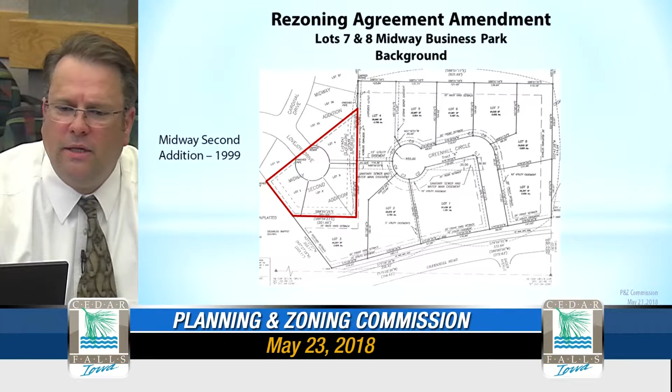That property is located along Greenhill Road. As the development continued, it started with the Midway second addition in 1999, which created 4 residential single-family lots off of Lovejoy Drive, creating a cul-de-sac. With that new cul-de-sac, it essentially takes away that traffic movement and isolates the rest of the development, about 7.5 acres, called the Midway Business Park, created in 2003.

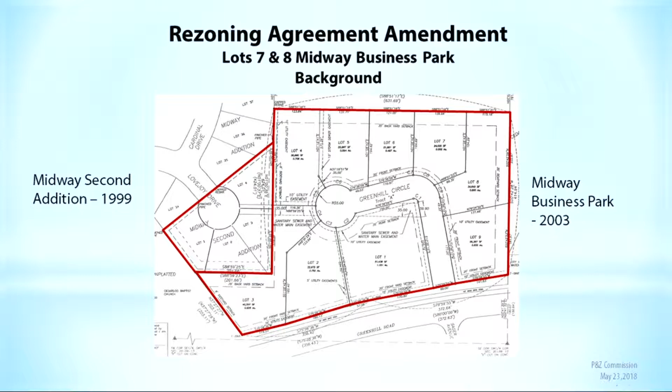That created 9 new lots for commercial development. Since then, the property owner, First Security State Bank, purchased all those lots and built their branch facility at Greenhill Circle, since around 2003. More recently, the Community Foundation of Northeast Iowa built their new building at the end of Greenhill Circle. Development hasn't been taking place much in that area since.

The new proposal is at the northeast corner for a senior housing facility, and this is a site plan of what that layout will look like. The staff report reflected a 2-story building, but this is going to be a single-story building for 16 residents.

These are senior assisted facility residents. Each resident has their own bedroom and bathroom, but they all come to common areas. So it's not 16 individual dwelling units, it's basically 1 unit for those tenants or residents.

They will not drive to this facility. The parking is there just for employees and visitors. So basically that site plan satisfies zoning requirements for the district, setbacks, parking and landscaping. This is a permitted use in the R4 zoning district, so staff believes this is a less intense use, and we would like to move forward with approval based on comments from the Planning and Zoning Commission, and schedule a public hearing at the next meeting.

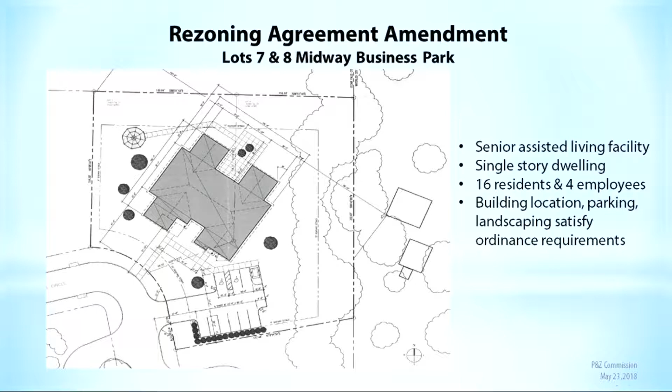We might have to trim it back a little, but we'd rather not get rid of it. Everybody wants some privacy, and we'd like to keep it if there's something we could do. If we had to do something, I'm sure we could create privacy again, but there won't be any outside noise or much going on there.

Is there any intention of taking Scenic Drive on into that field there, around my house, ever, as part of this plan or a future plan? You're referring to the field to the north of this development? Well, yeah, it'd be to the north.

That field is a detention basin. It serves as open space and detention. It's owned by the city, and that will remain that way in perpetuity.

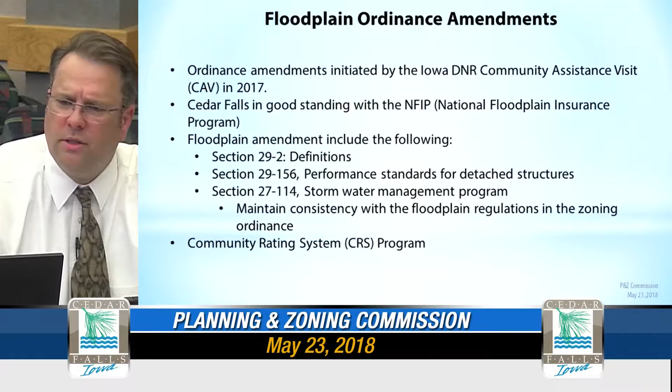With these definitions and changes, that'll just maintain our status in the CRS program. So I want to go through some of these definitions real quick. The idea is that we have a definitions section in the zoning ordinance with general zoning terms, and within that list we also have floodplain terms.

So what we want to do is create a new subsection—one subsection would be general zoning ordinance terms, and the other would be general floodplain terms, just so we can tell the two lists of definitions apart.

Base flood elevation is the elevation of flood waters during that occasion or flood event, referred to as BFE. Those BFEs are shown on flood maps and flood profiles. You might have heard of the 100-year flood or the 500-year flood—those are the base flood elevations for a particular area.

This elevation requirement serves as a guide for structures, and as a structure is elevated, that determines flood insurance premiums. New definitions include factory-built home park or subdivision—FEMA calls those mobile home parks, so we're adding those new terms. Highest adjacent grade is just the grade around the structure.

What's the highest point around the structure? We use that highest adjacent grade and compare it to the Base Flood Elevation, and that tells a property owner or contractor how high to elevate and protect that structure.

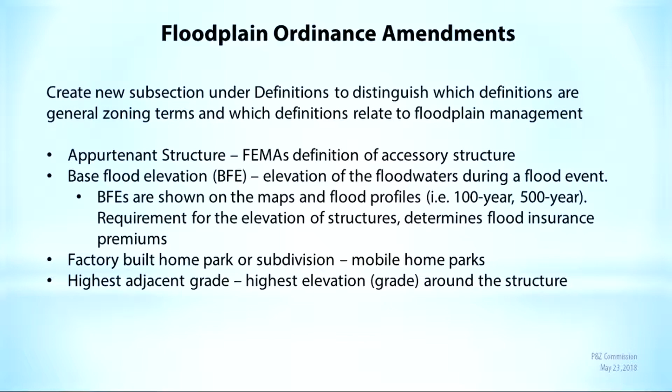Moving on to repetitive loss, this is associated with the type of loss a property receives during any particular flood event. We look at degree of loss or substantial loss, meaning any loss that exceeds 50% of the market value of the house. When that threshold is reached, the property owner is required to upgrade or elevate their house.

With repetitive loss, we can combine multiple flood events to reach that 50% rule. So in the 2008 flood event, someone might have had a 25% loss, then a 30% loss in the 2016 flood event. Together those exceed the 50% rule, so they'd have to improve their structure to meet current standards in the ordinance.

This also allows the property owner to look for flood insurance funds to elevate. There are some funds available to assist property owners with elevating the structure, and again, it adds value to our CRS performance.

Start of construction is a kind of confusing definition for staff, but hopefully I've cleared it up. Basically, start of construction determines when flood maps are renewed or changed, when any base flood elevation is changed, or any flood zone is changed. So if a map is changed, your property must comply with the current zoning ordinance.

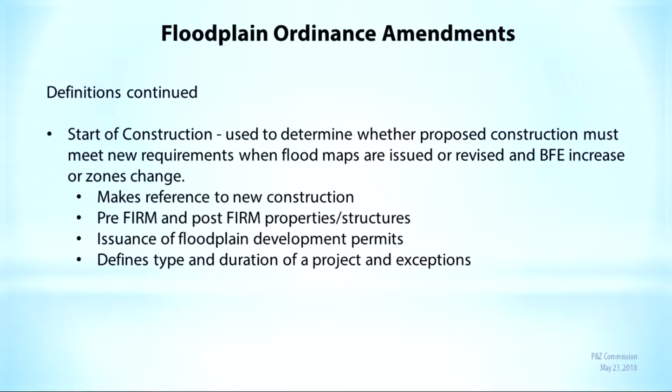It also defines the duration and type of project. The duration means once you get a building permit, you have 180 days to finish the job, and that includes any type of improvement. There are exceptions that don't trigger that 180-day time frame, like site preparation or grading around the property. So that's just another change to note.

So again, we want to recommend approval of those amendments. It reinforces our flood insurance program and regulations, and we'll meet those standards for FEMA and the National Flood Insurance Program. We'd like to hear any comments you have and set a date for public hearing at the next meeting.

Commissioners, any questions or comments? Yeah, David, I think back when we redid the ordinances after the 2008 event, we spent a lot of time on fill and those kinds of topics. When we look at what you just presented, do you see any conflict with what we rewrote regarding how much fill we could bring into certain areas?

No, it doesn't impact the fill criteria for a property. It doesn't impact that, we changed that elevation standard from 100 to 500 year plus 1 foot. Right, it doesn't change that. So really, it's more new definitions and some minor changes in the performance standards for garages. I'm just looking for conflict between one rule and another.

Yeah, I should have mentioned this earlier. These were comments from DNR, so we developed a staff report and sent this back down to them for final review. They're kind of in the process of reviewing this. They sent us the comments, and I put this in the staff report, so I gave them the opportunity for one more review.

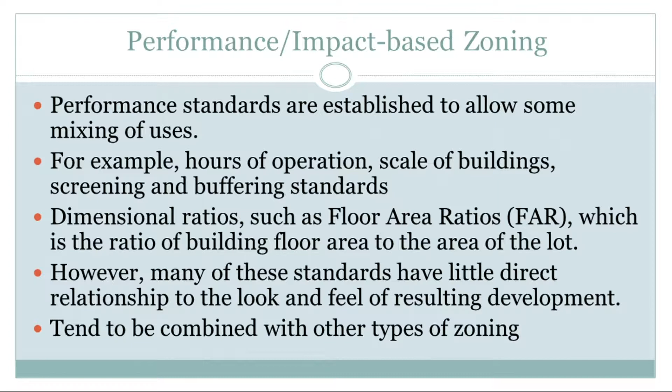Moving on to incentive-based zoning, which is also a use-based organizing principle. Incentive-based zoning enables projects to exceed the base standard. So maybe a building can be 3 stories tall if they provide some additional benefit to the local community. For example, in exchange for providing parks, public art, or affordable housing, you can give them a bonus, maybe a taller building or more dense development, or allow them to cover more of the lot.

The issue with that type of zoning is it can achieve a lot of really great public benefits for the community, but it's usually a negotiated process. It's a little bit messier, can be time consuming and a little unpredictable. But it can result in some pretty good development for the community.

Moving on to the final type of zoning. We have all these traditional types of zoning that are really use-based zoning, as opposed to form-based zoning. Traditional zoning techniques are all organized on the principle of separation of uses. Form-based zoning has a fundamentally different organizing principle. It's based on the form of the buildings, the placement of buildings on the lot, placement of parking on a lot, and how the private space of the building meets the public space at the street.

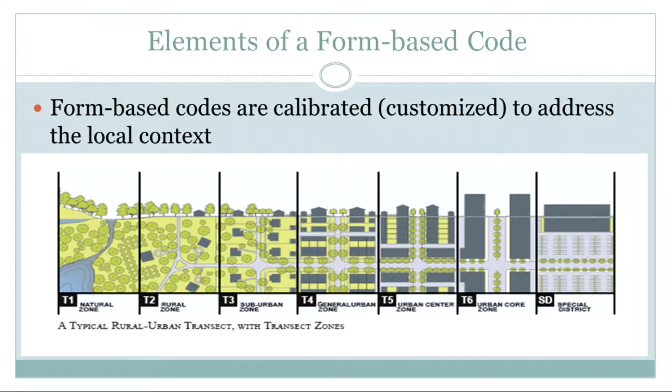So just a little bit about a form-based code. The beauty of a form-based code is that it can be customized to address the local character of an area. You can get as fine-grained as looking at, say, a downtown or a core neighborhood street by street, and code those streets to get exactly the type of character that you desire in the future.

So you set it up to achieve a certain desired community character that's identified through a planning effort, and you're allowed to mix the uses over time. The development standards are fairly prescriptive, and the standards in the code are usually illustrated rather than described in narrative form.

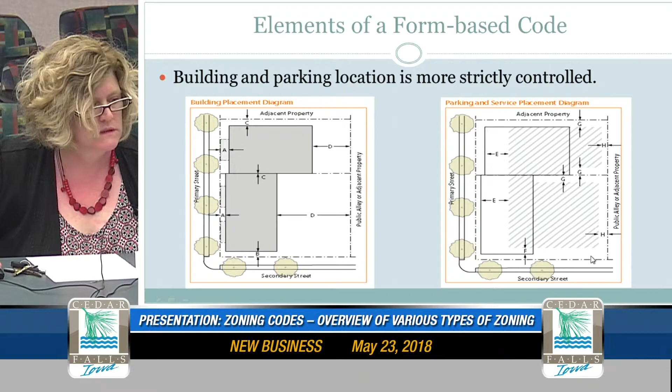There's also usually some sort of height standards, but the residential or commercial intensity or density is really controlled by height and parking requirements, and sometimes those are also illustrated on the regulating plan.

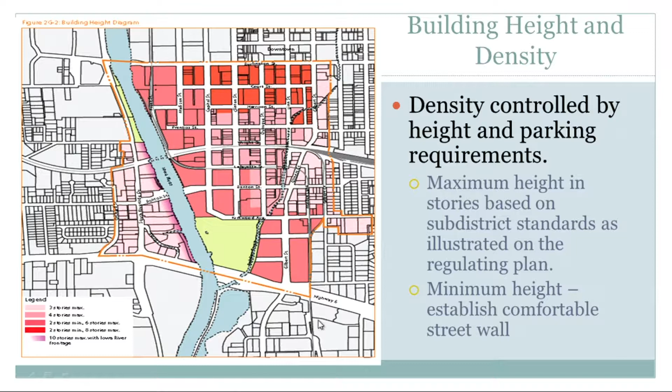Usually there's a broad range of commercial or residential uses allowed, and those are allowed to transition over time. For example, maybe you have a street with older single-family homes right near a commercial area, and there's some desire to transform those into private offices, but people don't want to lose the character of those homes. So it's coded so that character is preserved, but you're allowed to have commercial uses moving in, or you can maintain the residential use. The idea is that uses can move in and out.

This can also be used for a brand new area where you're trying to encourage storefront commercial, but the market's not quite there yet. You build the storefront space ahead of time anticipating that demand, but allow it to be used as a live-work unit with maybe a small home office. Then as the market reaches the point where there's demand for a coffee shop or retail, it can transition to those more intensive uses.

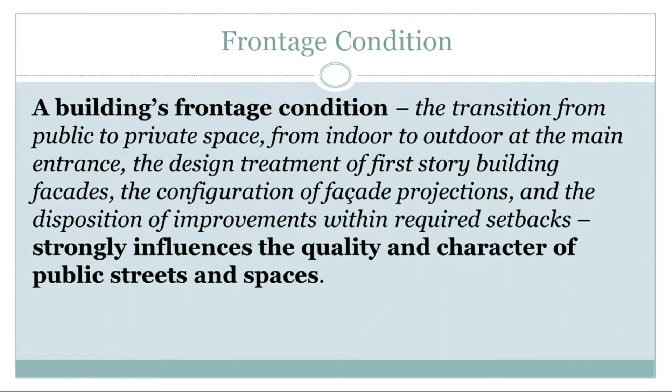How the building meets the street is really important. That's how people experience a city — you're not looking up at the top of a building, you're walking down the street experiencing that first floor and how those spaces meet the public sidewalk, or walking down a residential street past front porches and front yards. That's the character of the neighborhood.

So form-based code really focuses on specifying appropriate types of frontage conditions with the appropriate type of building.

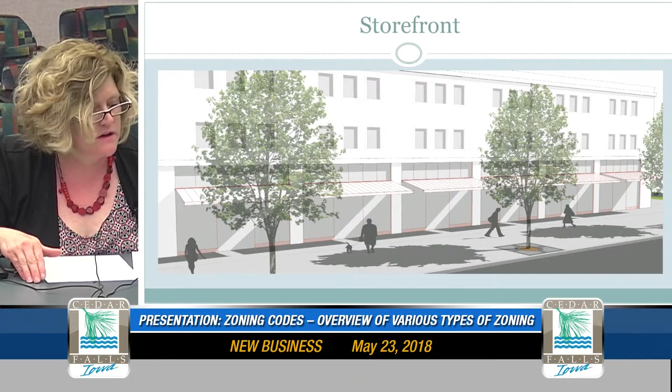Here's a storefront frontage — we're all familiar with that, it's downtown in all our Main Street buildings. It encourages shopping and window displays, restaurants, and activity at the street level.

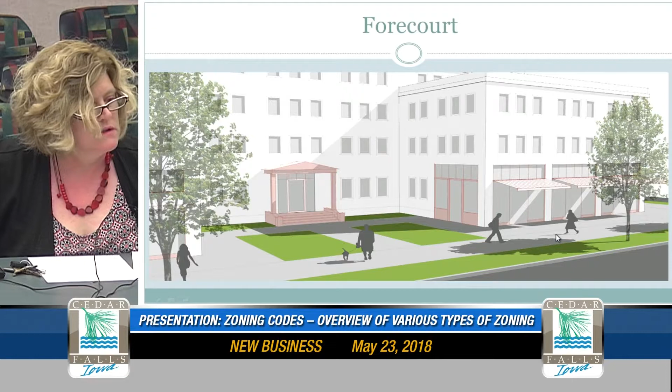A forecourt is a frontage where a portion of the block is set back from the street. Here's a commercial example where they set it back to create an amenity for the urban neighborhood, a bit of green space in a dense environment. And this is your typical old U-shaped apartment building, with the middle entranceway set back to create a little courtyard in front.

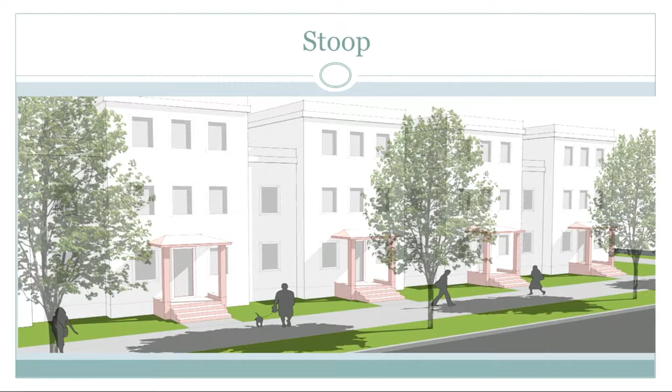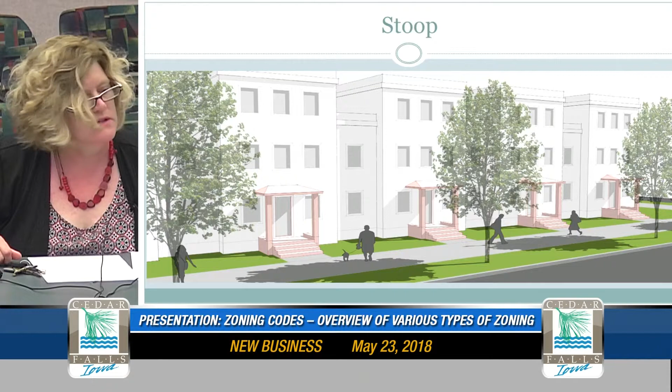Stoops — most buildings have them, where the first level of the floor is raised up, mostly used for residential development. If a building is close to the street, raising the first floor provides privacy so people walking by aren't looking right into your window. That's the idea of the front stoop, a principle used for hundreds of years, seen in buildings from modern to traditional brownstones.

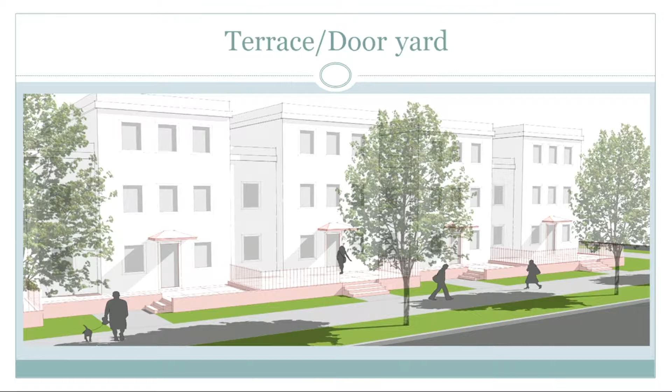The idea of a terrace or dooryard is similar — you raise a residential use above the sidewalk. Usually the building is close to the street, but this provides a little open space between the public sidewalk and the private space, creating a semi-private area for residents. It can be raised or behind a fence to create a dooryard or raised terrace, giving a bit of privacy and open space while staying near the public sidewalk.

And then the porch frontage — everybody's familiar with that, here are some nice examples. The idea is to pair the appropriate frontage standards with the appropriate type of building.

So form-based codes will often have building types depending on the area of the city you're in, like a typical residential neighborhood. This is the concept of missing middle housing, kind of a new buzz term that's out there, coined by Dan Parolek from Opticos Design, a firm out of California.

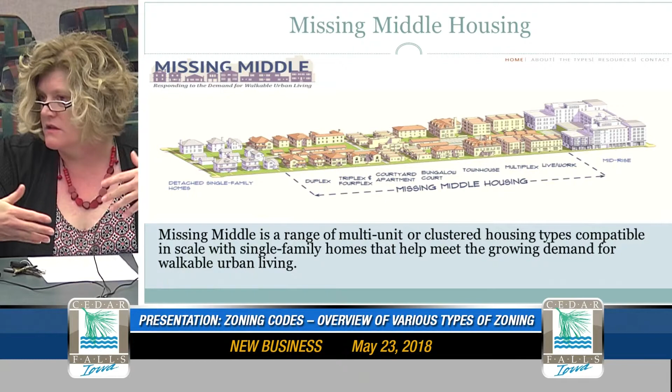The idea is that we used to build neighborhoods with a mix of housing types, from single-family homes, duplexes, triplexes, bungalow courts, and townhomes, all mixed into the same neighborhood, but all the same scale so they seemed to go together. If you walk around central Cedar Falls, you see some of those courtyard buildings and duplexes, and when you're walking by, they're really the scale of a single-family home, so they blend well together. Even though they're a little more dense with more people living there, they still feel like they fit in with the character of the neighborhood.

We stopped building these after World War II, and a lot of zoning codes disallowed it because we separated the uses, saying you can only build single-family homes here, townhomes over here, and multifamily buildings over there. That's why he coined the phrase missing middle, because we missed a lot of these housing types, but there's real demand for that walkable urban neighborhood—from empty nesters downsizing, to young people trying to start out with more affordable units.

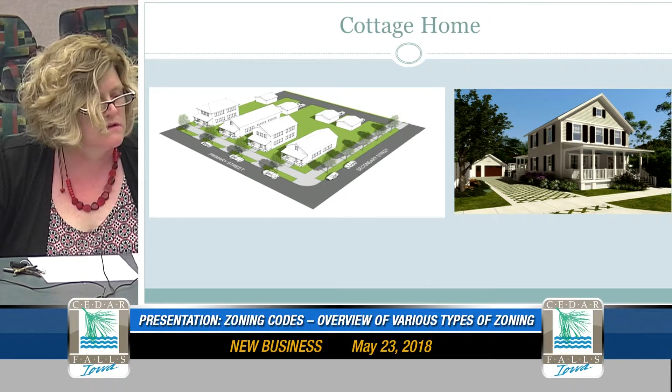So here are some illustrations of the various types of buildings. This one is interesting—the idea that you take several lots in a neighborhood and create small cottages that surround a green courtyard, creating a little sense of community. That's called a cottage court, and some communities have adopted cottage cluster ordinances to allow this sort of thing. It's very popular in cities with an affordable housing problem, and also popular among retirees and empty nesters trying to downsize but who still want that sense of community and single-family character.

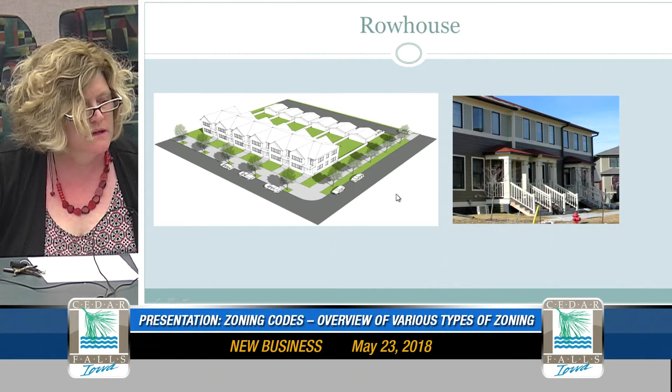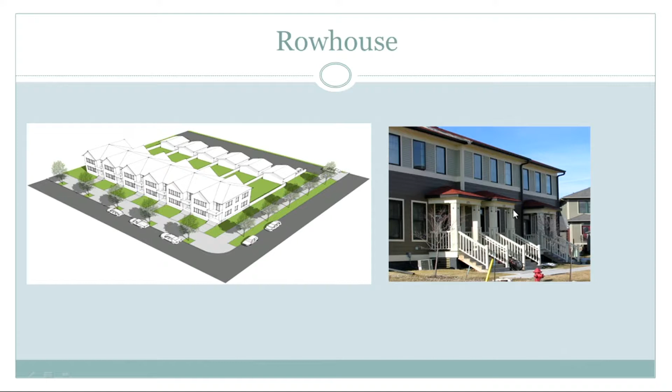Of course, the typical row houses with alley-loaded garages, and townhomes. The idea here is that all the entrances face the street, and you tuck your garages behind the units, so they still have that residential character along the street. Here are townhouses, a little more dense—you don't have the rear yards, so you have what's called a parking mews between the residential units. These units face this street, and those units face the opposing street.

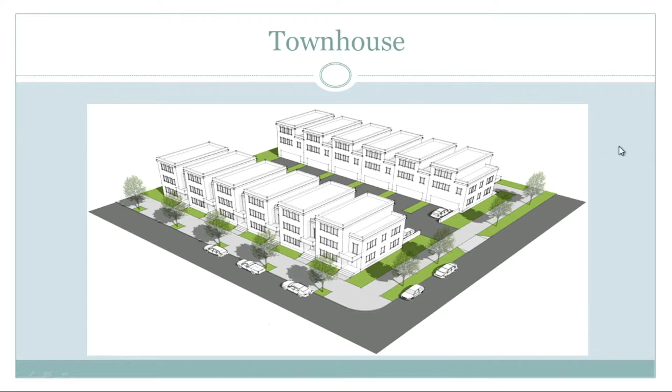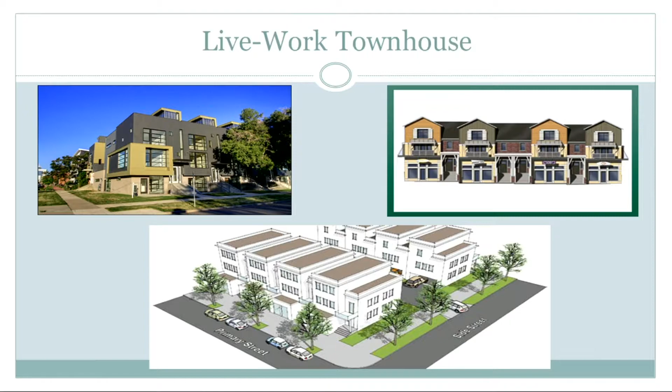The idea I mentioned of live-work townhomes is that you could live and work in the same space—kind of an urban type of living. You also see them sometimes in mixed-use buildings where the first level... I think Des Moines has some live-work units in the East Village where people have professional offices but are also living there.

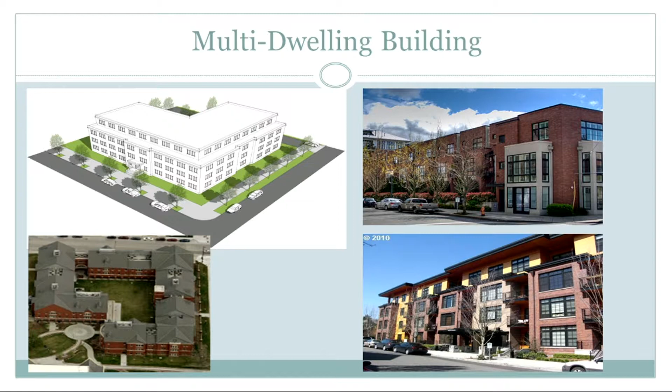Small apartment buildings at the scale of a large house that fits into a neighborhood—I think this is a six-plex. And then moving up in density to the larger multi-family buildings, which could be any configuration.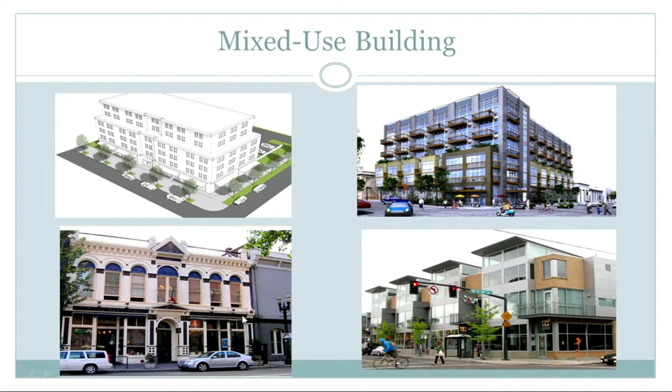And then up again to the idea of a mixed-use building. Now, I want to point out that form-based code isn't necessarily about architecture or style. You can make it that way—you could adopt standards that talk about a certain style of architecture—but that's not the basis of a code. Form-based code can allow everything from modern architecture to more traditional forms of the building.

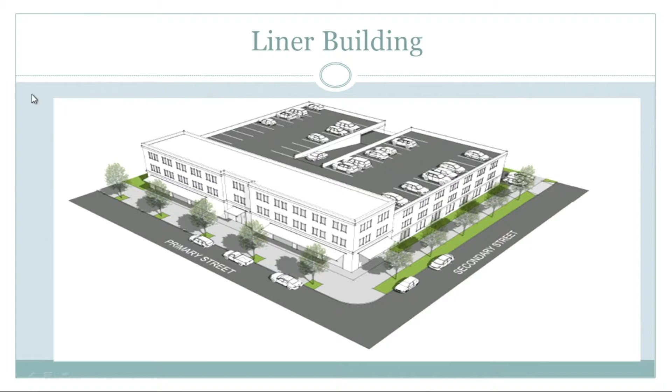And then just your basic commercial buildings. This is an interesting building type, it's called a liner building. So we do need parking, and a lot of times there's parking structures in denser parts of the city. The idea is to shield the view of a parking garage from the street.

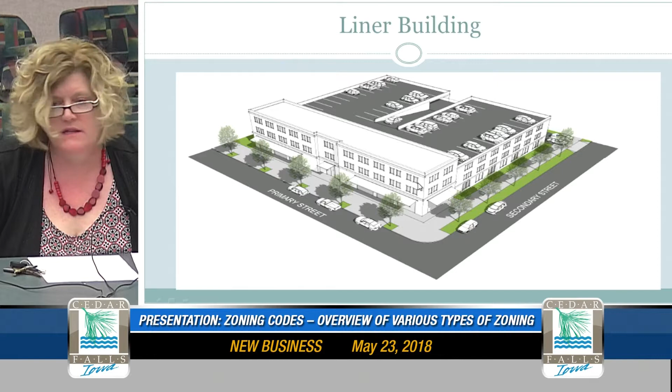So you build a shallow building that hides the parking from view. That can be everything from a mixed-use building to one that's in front of a parking garage. Here's a drawing of a liner building.

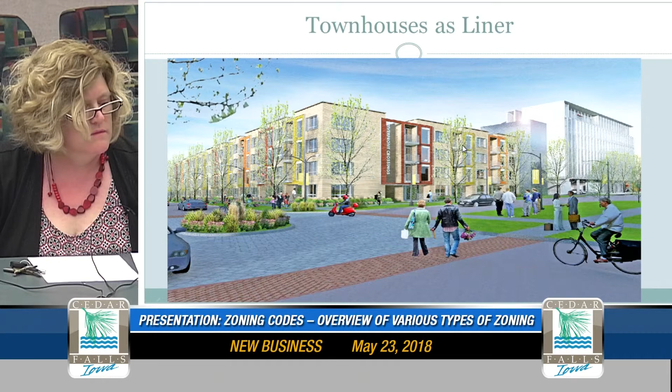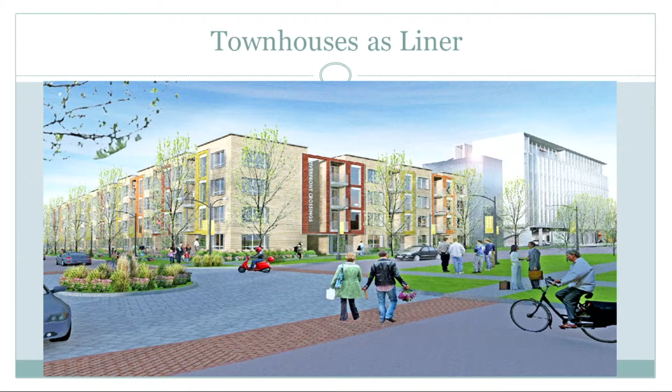That's been built in Iowa City. There's a municipal parking garage—it doesn't quite look like this, this was the original design—but there is a parking structure behind it, and then there's all these townhome units that face the street. I think there's like 600 parking spaces behind the townhomes.

And then the codes usually have some allowance for institutional buildings in the community. So once again, a zoning code usually just regulates private space and not the public spaces—the public right-of-way, the sidewalks in the street. A form-based zoning ordinance often will regulate both, so there's a lot of times street standards in a form-based code, and it also speaks to how that private space meets the public space.

Here's this drawing. This line represents the public right-of-way space, so this is public space here, and this is the private frontage area. The code will have standards for street trees, public sidewalks, what can happen in what they call the public realm, and then how that frontage type meets that public space.

So there'll be setback standards that say, in this particular area, you have to set your building back here, but your stoop and your porch can extend into that area.

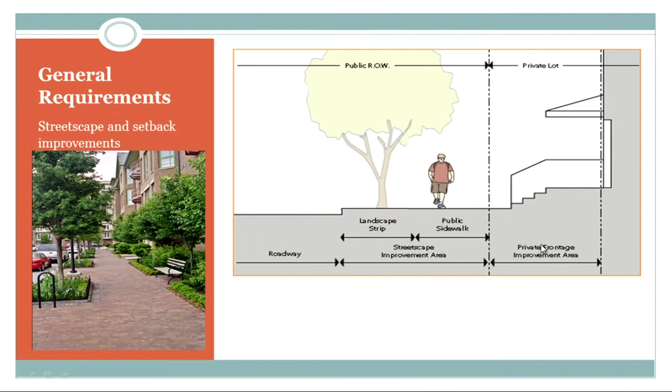And then usually there's some sort of building design standards in a form-based code that really speak to things like the bulk of the building, breaking up the facade to create that rhythm along the street. So sometimes building articulation standards, building entranceway standards, window coverage, building materials, design of the roof, signage standards that are appropriate to the frontage type.

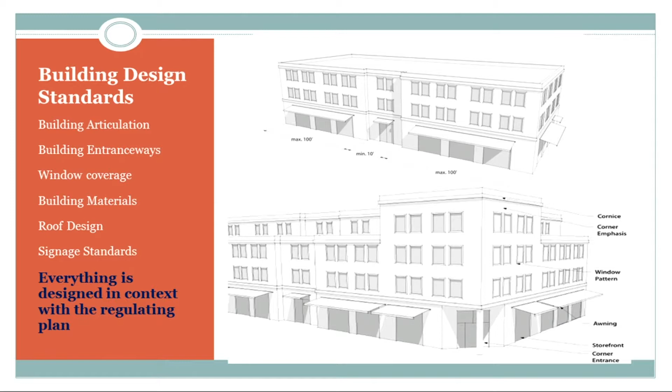So everything is designed in context with what you have on your regulating plan, basically. So different parts of the community would have different building design standards potentially.

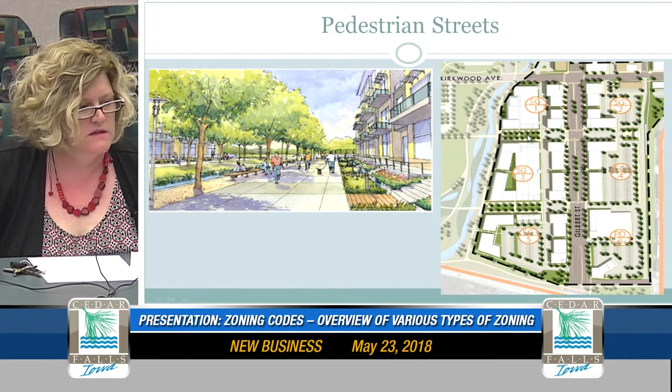In Iowa City, we use that idea in the Riverfront Crossings District. This is a major arterial street, and this is a new floodplain park. There wasn't really a need to continue the street grid, but we wanted to create a street grid. We didn't need to allow vehicles to go there because the park was in the way, so the idea was to create these green streets, these pedestrian streets that would lead over to the park.

And then sometimes you have special provisions that you desire in the community, like open space requirements for denser housing types.

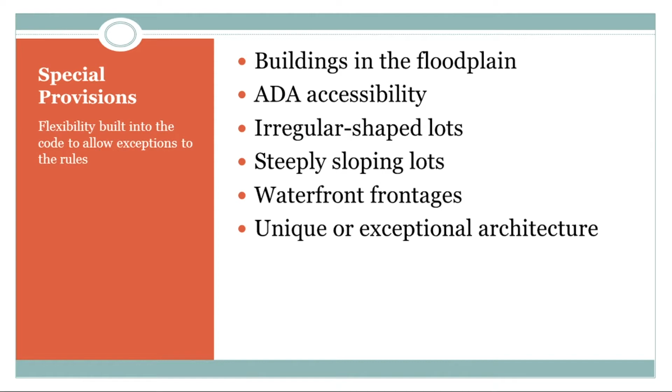And then, of course, there's flexibility usually built into the code because they have fairly prescriptive standards. You're going to have situations where you have steep slopes or irregular shaped lots, maybe buildings that front on a creek or some environmental feature. So there's usually flexibility built right into the standards that say in these situations, things can be adjusted fairly easily through an administrative process or through review by a committee or design review committee. So it keeps things moving, with specific standards in the code set up to address those types of situations.

So just in summary, there's many different options for zoning, some based on the context and goals we're trying to achieve in the community. The basics of good zoning apply regardless of the type of zoning we're using. The idea is to continue improving the zoning code, establish clear and objective standards, and eliminate the kind of ambiguity that creates problems with the process. That provides more certainty in the market and less risk and cost for developers, less risk for neighborhood residents, and for policymakers because there's more certainty. So it encourages investment and reinvestment in the community, and development is more aligned with the vision the community has established. That's all I have today.

Do you have any questions?

So was the form-based code being looked at a little more toward redoing our code? Well, I know it's been discussed. I've heard different people talk about it. I don't know if anything's really been decided, but it could be that we try it in a certain area of town and see how it goes. A lot of communities start out trying it in one section and see how it operates, kind of a pilot.